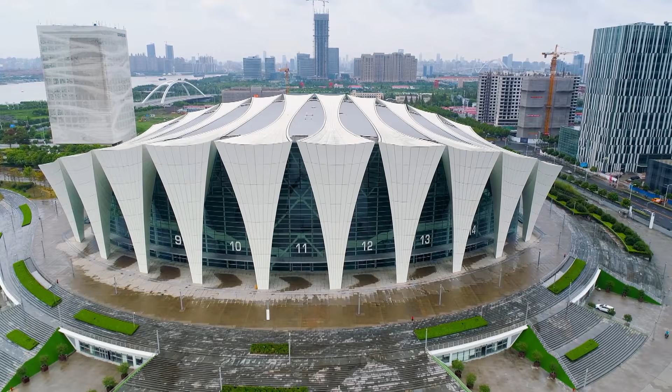Shanghai, city of the future. Vying for attention in this fast-growing, high-tech metropolis is some of the world's most cutting-edge architecture and ever more extraordinary feats of engineering.

There is a great competition for creating these landmark buildings. The clients have always asked me, build me a landmark.

Architect Martin Jochman has been set a seemingly impossible challenge: to design a radical new hotel that will stand out in this hotbed of innovation.

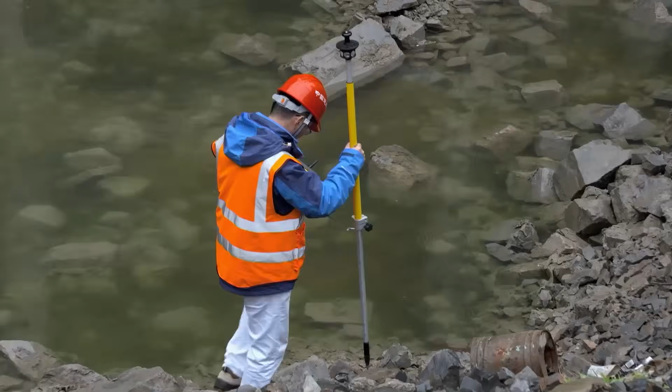But the unique site totally defies convention. It must be built 90 meters below ground level in an abandoned, flooded quarry. When I came here almost 12 years ago, it was just a hole in the ground. Now, over the years, against all the odds, this has changed.

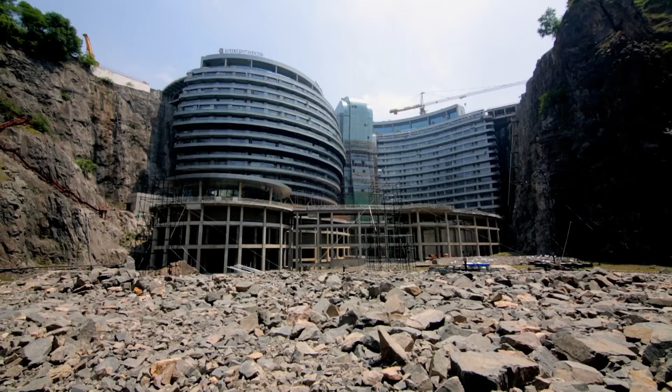Martin's master plan is one of the world's most inventive buildings. Resembling something from a James Bond movie is the InterContinental Shanghai Wonderland.

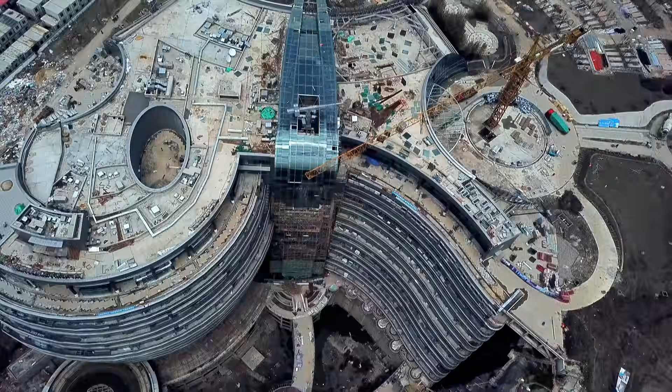This giant quarry hotel spans 100,000 square meters and is the first of its kind on the planet.

Helping to realize this epic multi-million-dollar fantasy project is chief engineer Xiaoxiang Chen.

I'm very proud of being a part of the project. Everybody is excited because it is the only one in the world.

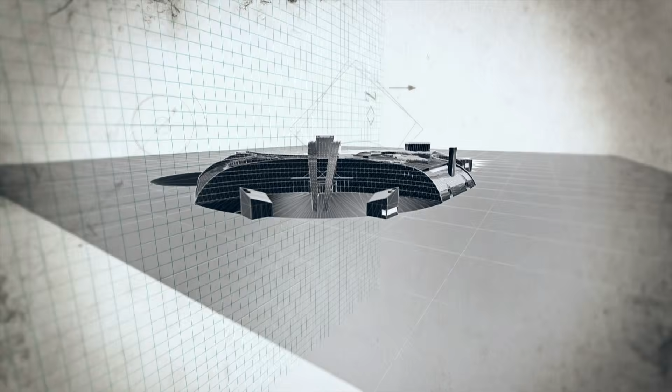What, at ground level, first appears to be a two-story building is in fact only the tip of the 336-room hotel. It projects out from the precipice and descends to the base of the quarry 90 meters below.

The glass wall in the center is designed to look like a waterfall cascading to the quarry floor. This will be flooded to create a lake, submerging the two lowest floors.

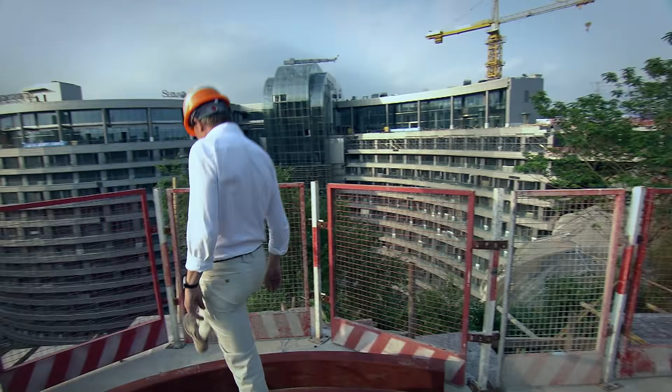It's an epic engineering challenge once thought impossible. Such an unusual location brings its problems to be solved. These can be summarized into the building shape, the seismic implications, and the fact that the building is partly underwater.

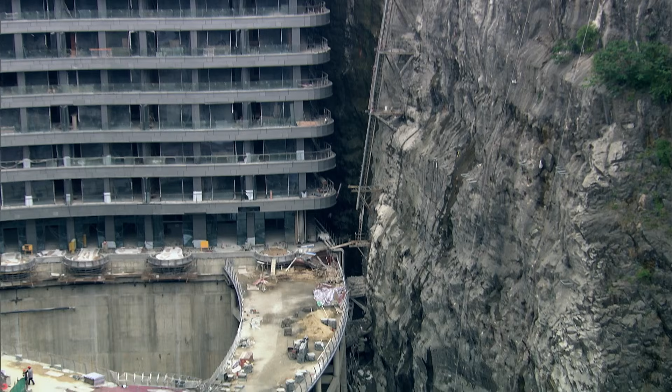Not only must it be waterproof and earthquake-proof, but the engineers are also faced with a giant problem that looms all around them. The biggest problem when we started designing this building was associated with the quarry itself, the composition of the rock.

This rock came out as part of a volcanic eruption, and it cooled rather quickly, which means some of it is quite solid, but some of it is crystallized and very, very crumbly. I can demonstrate how this crumbles easily in your hands.

This problem had to be really solved before we could start on the main part of the construction, both for the safety of the guests, but also for the safety of the workers on site. Failure to secure the unstable cliffs will mean disaster for the project.

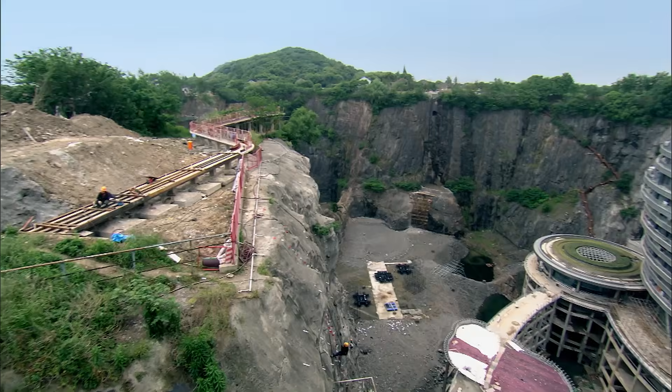Building this groundbreaking hotel will need some impossible engineering from the past.

The problem with rock walls is that they're prone to collapse. One reason why more discerning humans ventured out of caves and into homes made of other materials.

The Nabateans took rock construction to the next level, carving Petra's fabulous sandstone temples and tombs. But over the centuries, many have crumbled.

The presidents of Mount Rushmore are hewn from the toughest granite. But even they need a facelift from time to time. Any hairline cracks are filled as soon as they appear. Hey, looking good, Abe.

But there's one device that's so effective at holding up rock walls, that climbers like engineer Dan Dickrell are willing to trust it with their lives.

Oh, here it gets spicy. Woo! So right now I've climbed this rock face. I'm hanging in the air, and all of my weight is going through that rock bolt, which is anchoring me to the surface.

So the rock bolt is a smart and simple idea developed over 100 years ago. And this simple idea might hold the secret to solving the problems at the Shanghai Hotel.

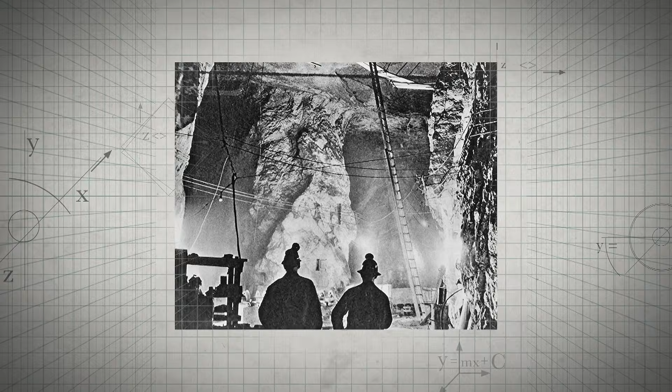St. Joe's was a forward-thinking company that prided itself on innovation. It recruited so-called experimental engineers, whose job it was to devise ways of extracting every ounce of ore.

These early problem solvers faced the challenge of scaling the heights of these walls. So this is what they came up with: the trapezes, a series of scaffolding suspended from the ceiling. The workers would work chipping away almost a skyscraper above the ground. The tools they used weighed 50, 60, 80 pounds. The men themselves were large, the rocks were heavy. Such a large amount of weight suspended above that cavernous drop.

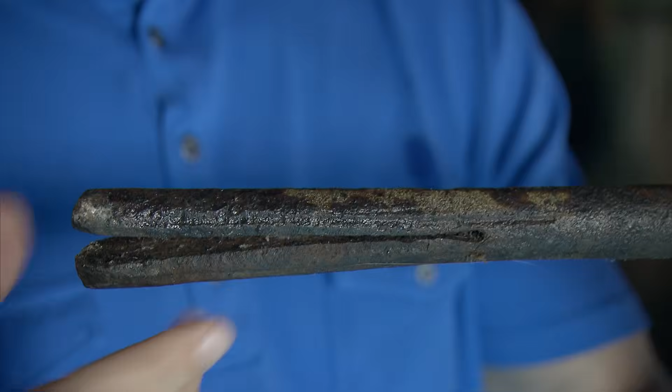Responsible for bearing all that weight, the newly invented rock bolts. This is actually an original 100-year-old split rock bolt. You can see the split on the end. How would this be installed? You drill a hole in the ceiling and then pound a piece of oak in, which effectively would be a wedge, so that when you put the bolt into that hole and pound it in, the wedge would slowly split open the bolt, creating a very, very strong anchoring point.

Trapeze mining was a great advance, but it was these rock bolts that proved to be the real innovation. It was noticed that after the scaffolding was removed, the rock bolts that still remained in the ceiling were holding up the loose rock that otherwise would cave in.

Securing a rock face is precisely what the team in China need to do. So how do the rock bolts achieve this?

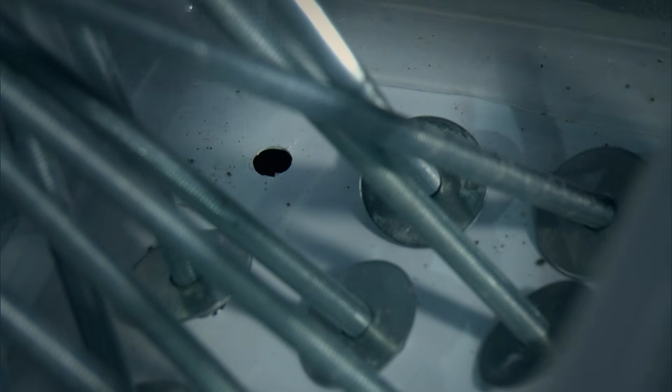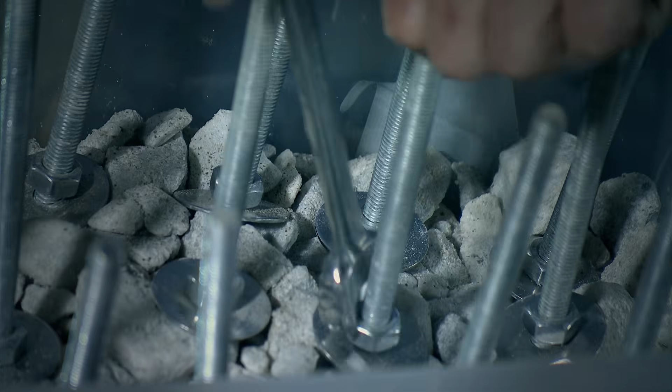I have a container that I'm going to fill with loose gravel. Now the thing about this container is it doesn't actually have a bottom. So now what we need to do is insert the bolts down into the temporary bottom. All right, let's put some gravel in here. I'm going to take the top washers and nuts and tighten them down. This will create a compressive force that binds all of the gravel together. This will replicate the forces at work when bolts are inserted into a crumbling rock ceiling.

I'm optimistic this is going to work. I'm going to need a bit of help, so I'm going to have Adam from the Bonne Terre mine come in and assist me with this. All right, Adam, slowly try and take the bottom off, the temporary bottom. What do you know? It worked. You wouldn't think it's possible, but check it out. It's really, really solid.

Management concluded that long bolts placed close together would safely knit the loose rock in the ceiling above us. Without knowing it, the miners here at Bonne Terre had inadvertently invented a real innovation, which is used all over the world today. What an accomplishment.

So how can the engineers in Shanghai take this century-old discovery and put it to work? Here are the rock bolts, which are a very important part of the stabilization of the cliffs. The rock bolts are in positions where they can be most effective in securing the cliff face on a certain grid.

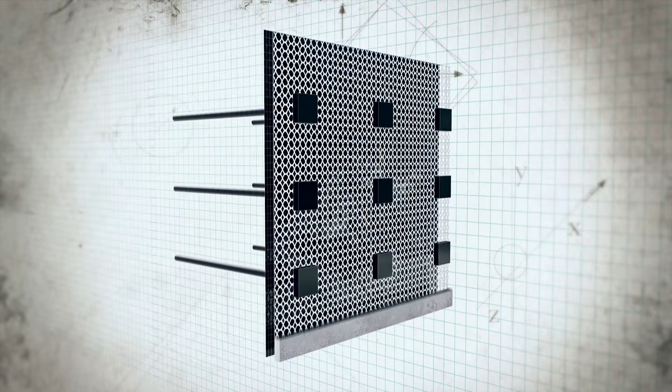The mesh, together with the shotcrete, will prevent the crumbly face of the cliff falling down and endangering the guests and the visitors. This process is quite unique to this project. It has never been done on this scale before. It is in fact one of the great challenges that had to be overcome to be able to end up with this amazing building.

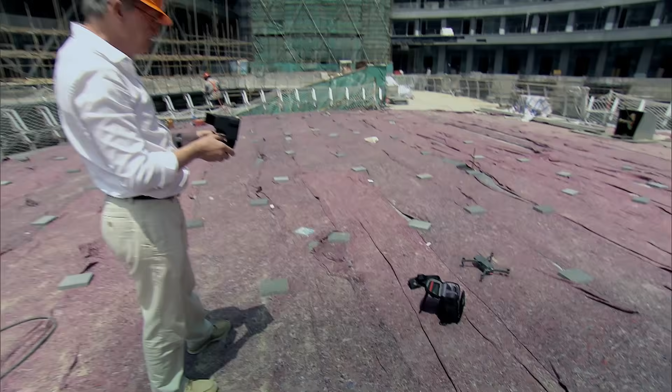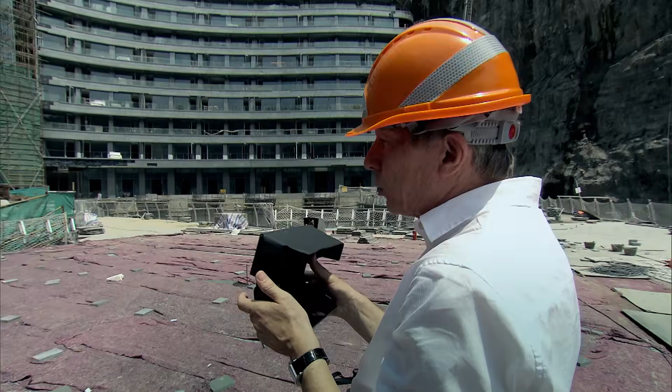And Martin has the tech to make the most of seeing his design come to life from every angle. Every time I come here, I'm amazed about the transformation of the site. To be able to actually get a picture from the same angle as you're rendering and be satisfied that this is really as close as you can get to your concept vision, that is very satisfying, actually.

But this unique design has to be built to withstand the most destructive forces on the planet. There's no precedent for this type of building in terms of seismic design. Embedded deep underground, how could they make this impossible piece of engineering earthquake-proof? Sometimes in the midnight, I wake up to think of the problem I should resolve.

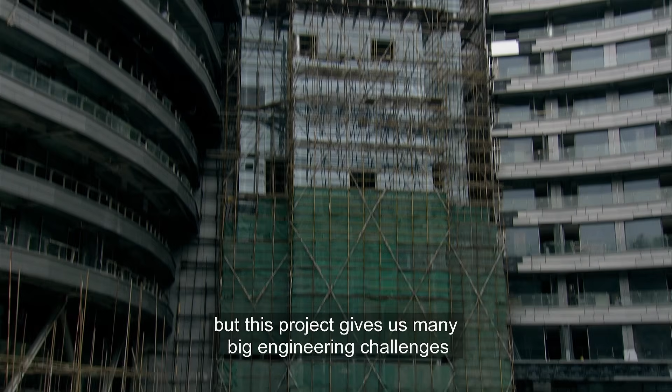In Shanghai, China, engineers are facing a subterranean challenge. This giant hole in the ground is the location for their city's newest state-of-the-art structure. A mega hotel built 90 meters below ground level. Progress is going well, we almost finished it. But this project gives us many big engineering challenges.

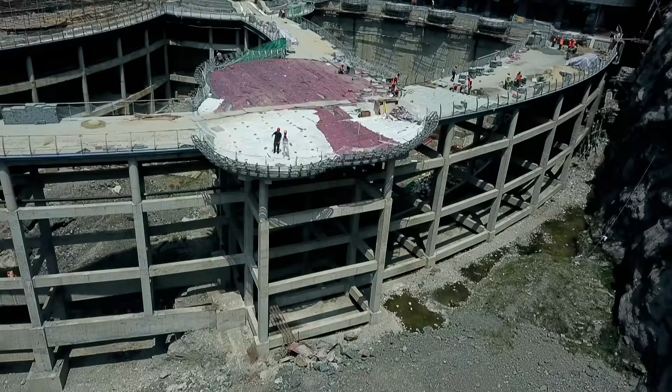Taller than the Statue of Liberty, the hotel is essentially an inverted L shape. The 10,000-ton steel mainframe is set into the base of the quarry, with the wider top section stretching out onto the clifftop above. But it has to be strong enough to withstand anything Mother Nature can throw at it, and this is earthquake territory.

There is no greater destructive force on the planet than that generated by an earthquake. And China is one of the most active seismic regions of the world. The point of convergence of the Indian and Eurasian tectonic plates, the country is riven with fault lines.

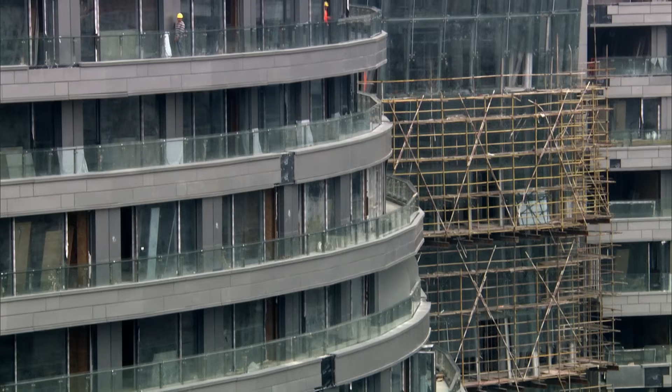Engineers here are experienced in using methods to combat earthquakes in conventional buildings. But nothing like this has ever been attempted before. There's no precedent for this type of building in terms of seismic design. So this creates a completely new problem to be solved, had to be done from first principles with the latest engineering technology.

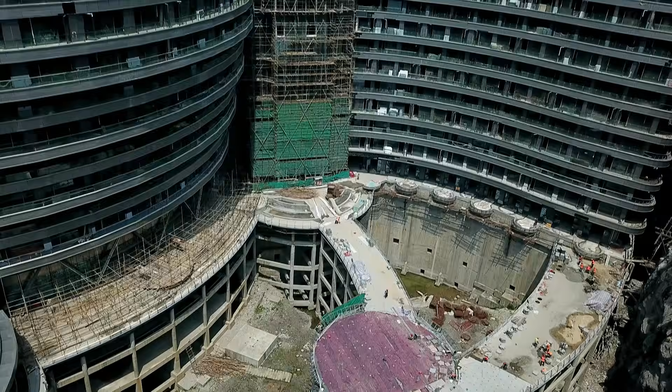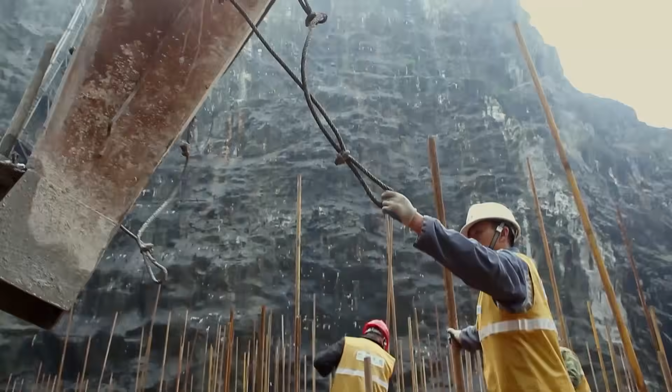To help it withstand the forces of an earthquake, massive foundations are required. As you can see, the foundations are immense, almost 50,000 cubic meters of concrete. It had to be so to give the steel structure the rigidity it needs, to embed the steel beams and columns into it quite deep, to satisfy the seismic regulations.

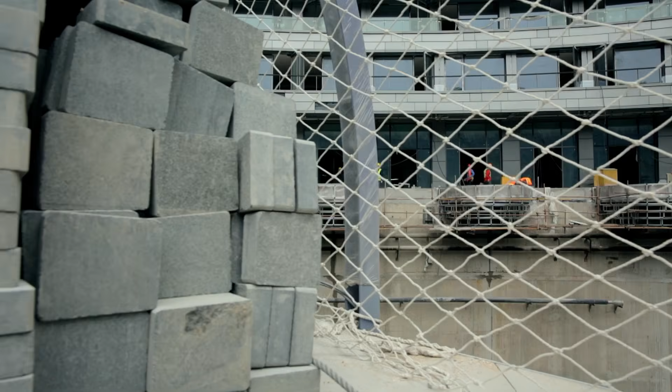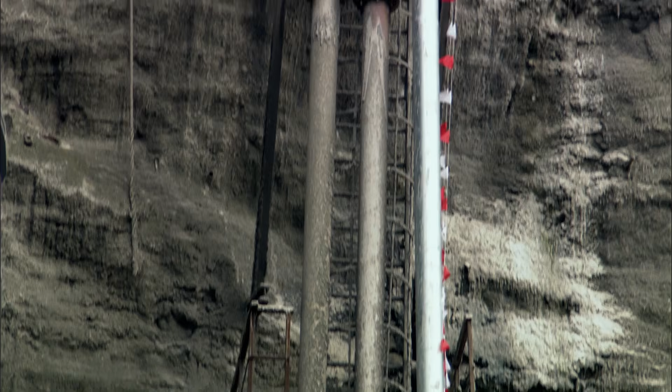But this throws a new problem: how to place such a large quantity of concrete so deep. In order to get such a vast amount of concrete to the quarry floor, the team need to come up with an innovation that defies gravity. The concrete for the foundations has to be mixed at the surface, then delivered to the base below. But sending it straight down a vertical drop means it's traveling too fast. The mix would start to separate, and by the time it reaches the bottom, it's unusable.

Normally on a building site, concrete is pumped upwards. This was placing it 90 meters down under a gravity situation, so a completely new method of pumping had to be devised for this.

It's up to Chief Engineer Xiaoxiang Chen and his team to come up with the solution. During the construction, we have encountered numerous challenges, and sometimes in the midnight, I wake up to think the project, to think the problem I should resolve.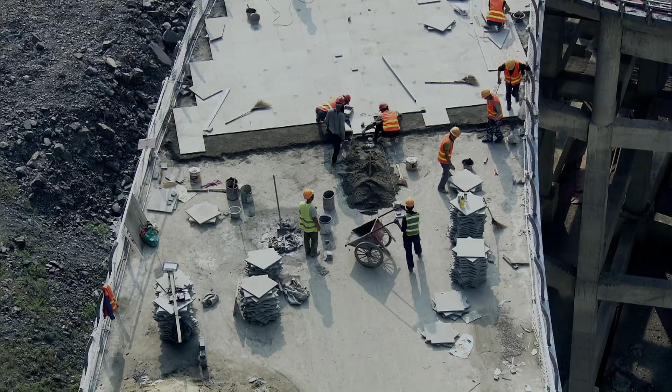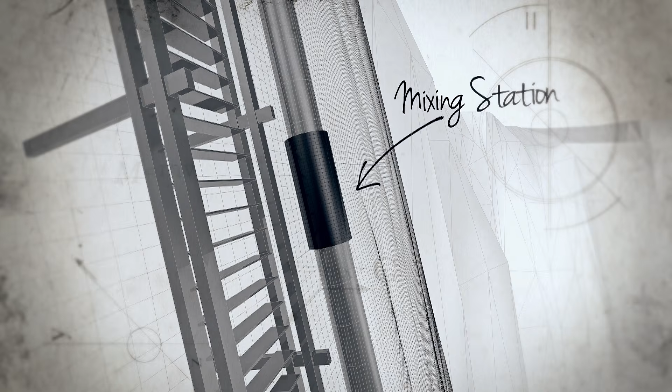The team need to find a way to slow down the concrete's rapid descent to make sure they end up with a stable mix. So they insert additional mixing stations. The concrete drops down the first 15 meters, then enters the station. It gets remixed and sent on its way, passing through 2 further mixing stations. So once it reaches the base, it's the perfect consistency. With lots of hard work, I'm very happy about the result.

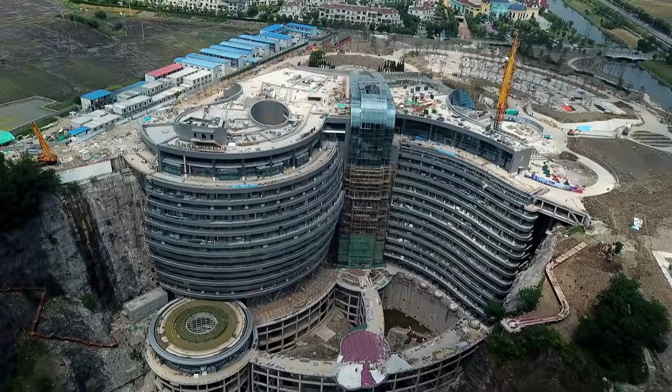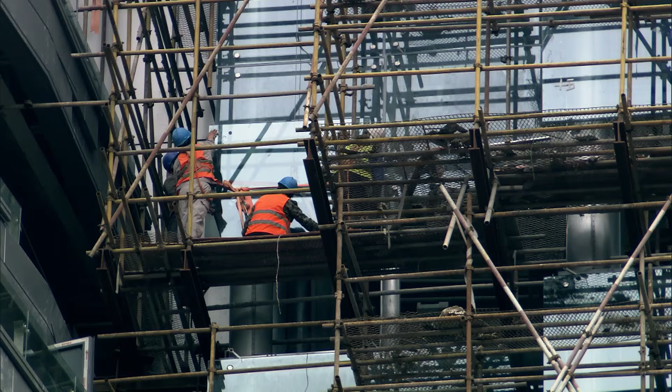But incredibly, 50,000 cubic meters of concrete on its own is not enough to protect it from an earthquake. Due to the hotel's unique design, the team need an extra engineering solution to prevent it from being pulled apart by opposing forces. It is a tall building attached at both ends, and in the event of an earthquake, both parts of the building move in different directions and different speeds. So this creates completely new problems. To prevent disaster, the engineers have to find a way to protect this unique structure.

When the Earth moves, the only survivors are those that can somehow go with the flow. The Incas built Machu Picchu from precision-cut stones with no mortar. The stones are said to dance through the tremors, then fall back into place.

China's Forbidden City has withstood over 200 earthquakes, thanks to an interlocking joint which spreads the impact of any tremors. What these techniques have in common is the flex factor.

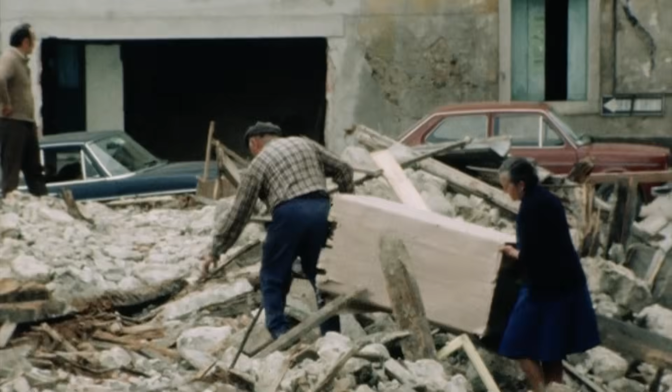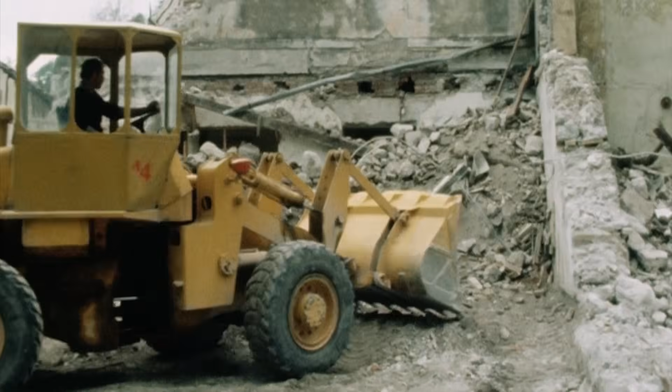Italy has suffered centuries of devastating earthquakes, more than any other European country. So engineers here have been developing new ways of building which won't yield to the forces that regularly rock the landscape. These might hold the key for the team in China.

During the last 40 years, we learned to build structures safe to withstand earthquakes. Seismic protection engineer Samuele Infanti works for the company that designed Europe's first bridge engineered to be earthquake resistant: the Somplago Viaduct.

Its twin decks run in parallel across Lake Cavazzo, and despite being 1.2 kilometers long, it remained standing when a powerful earthquake destroyed the nearby village.

So now we are entering the village of Somplago. As we can see, more or less all the houses were rebuilt after the earthquake. But it was only the bridge that survived that earthquake with no damages. So how exactly did the bridge remain intact?

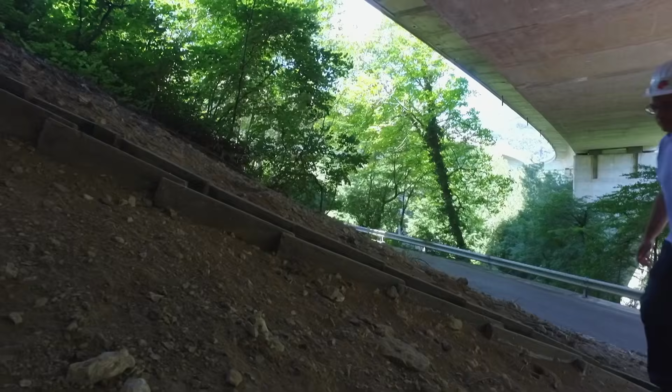Like the Wonderland Hotel, it's attached to high ground at the top and low ground at its base. The secret of its success can be found where the underside of the road deck meets the top of its vertical piers.

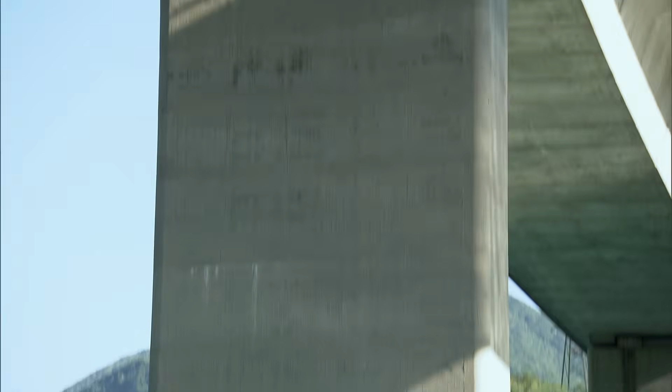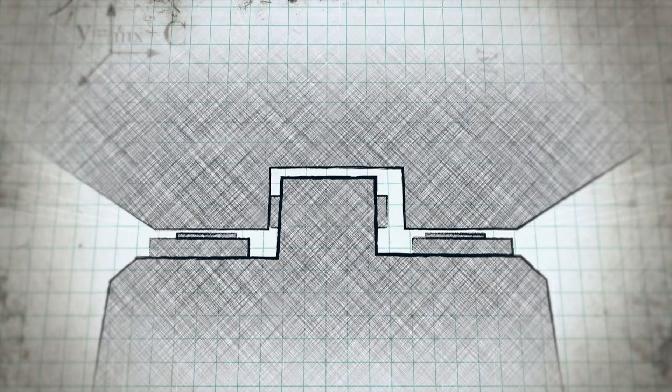The idea was to isolate the deck above the bearings from the ground. During an earthquake, this bridge will move back and forth along the longitudinal direction. Using a principle known as seismic isolation, the key mechanisms are the mighty bearings which cap each individual pier. These are made up of sliding metal plates which allow the deck to move freely, protecting it from tremors at its base.

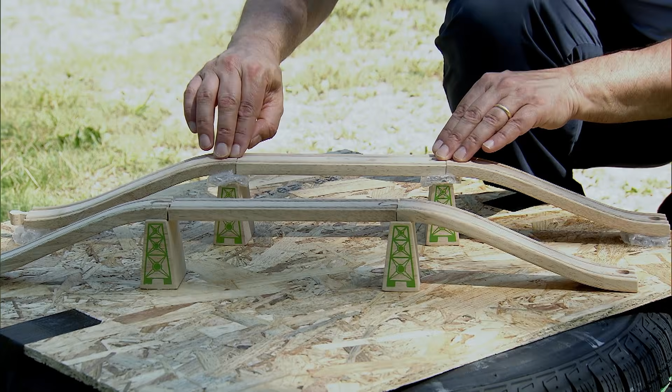We want to simulate the effect of a seismic event, and this represents a conventional way of fixing the deck to the piers. But on the second bridge, bubble wrap is added to simulate the bearings. We can see that now the deck is kind of isolated - we can move it back and forth in all directions. These elements provide a filter-like effect, filtering the acceleration transmitted by the ground moving at the occurrence of the earthquake.

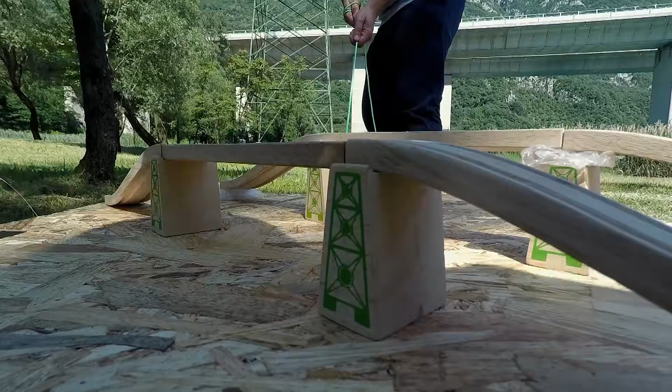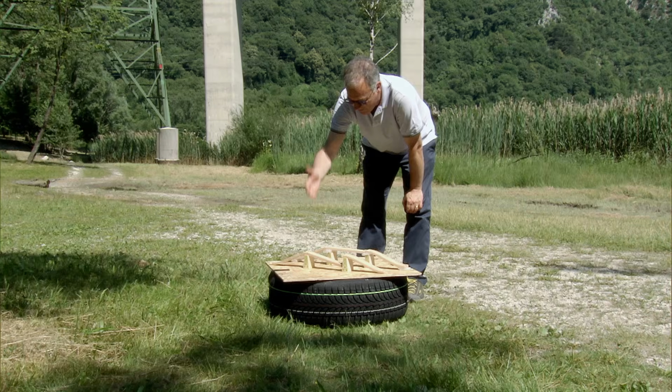Dragging the bridges will replicate the vibrations of an earthquake. You see that this model provided the typical collapse, whilst the other survived without damages. The bubble wrap in this case is simulating the behavior of the isolators. It means that the ground will move in a very quick manner, while the deck will move slowly, and immediately after the earthquake, the bridge can be ready to survive another event, an aftershock. This way we can avoid the damage.

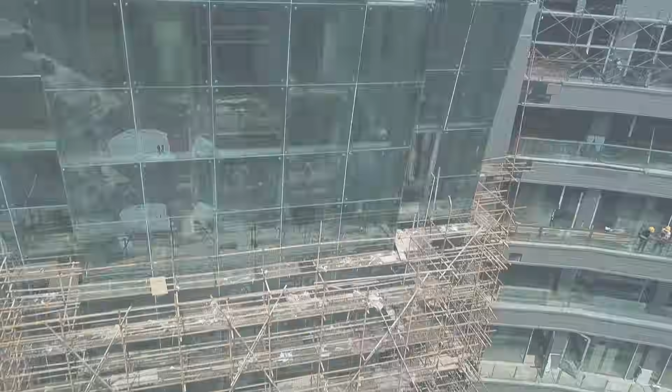The principle of base isolation has been applied to structures around the world, saving countless lives. But can the engineers in China apply the same method to this unique construction project to avoid destruction?

The structural solution is totally unprecedented and comes with the fact that it's a building fixed at two ends. In order to satisfy the seismic requirements of the earthquake, it is important that this structure can move to a certain extent.

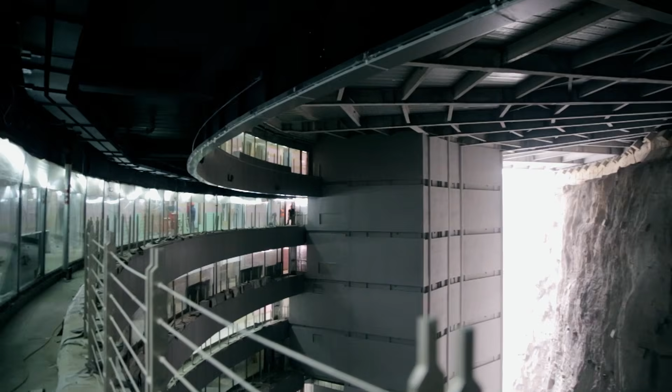Here in the inner atrium, the rear of the hotel looks out onto the rugged exposed wall of the original quarry and the steel framework that supports the building. It's this that provides the ultimate defense against earthquakes.

The structure consists of horizontal trusses that sit on a concrete beam. These are then connected to the vertical trusses that are firmly embedded in the mass concrete at the base of the hotel. Together they form a very rigid structure, but in case of earthquake, this can still move.

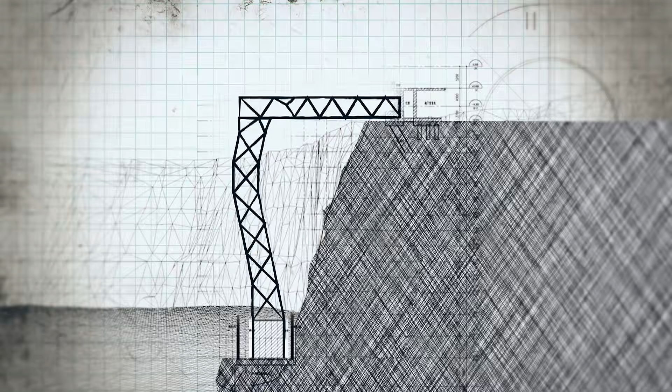The horizontal trusses are not fixed to the platform at the top. Should the worst happen, the horizontal trusses can slide back and forth and ride out any seismic activity. It's actually sitting loosely on a platform that will allow it to move freely. This will make it possible for the building to stand up during a very strong earthquake. It is a unique solution to a unique construction problem.

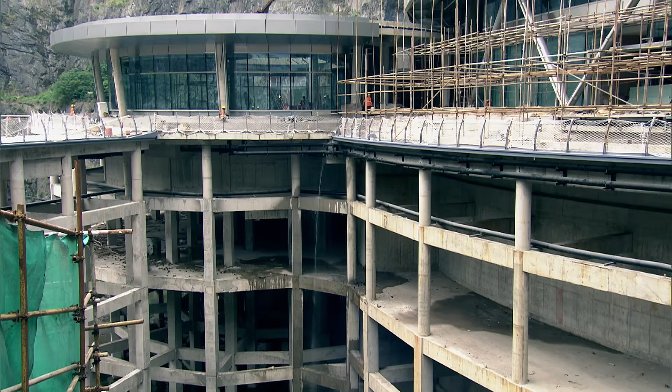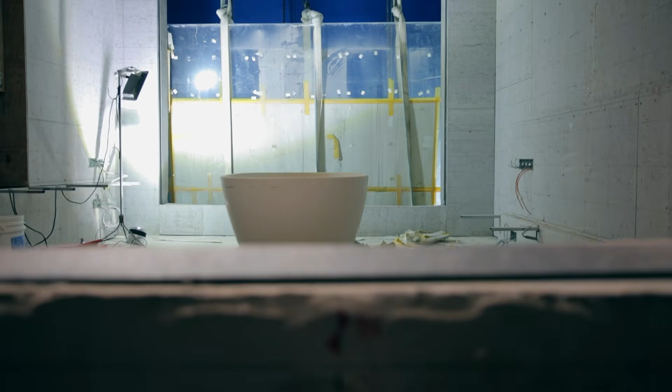With the structure now earthquake resistant, the engineers must face the next impossible engineering challenge: creating rooms underwater. There is no light in this corridor because right now we are working on the underwater space. But how can the submerged levels of this futuristic development withstand huge amounts of water pressure? As an engineer, we need to find a solution for that.

Here in Shanghai, developers are pouring hundreds of millions of dollars into this giant hole in the ground to create a mega hotel - the first one ever to be built in a quarry.

Its architect is Martin Jochman. Such an unusual location brings many challenges. One of those is the fact that part of the building is underwater. In fact, where we are standing will be submerged. The quarry originally had a lake at its base, which was pumped out into the canal that runs above it. But the plan is to flood the quarry again before it opens.

Walkways will cross the man-made lake to a central island, and a brand new waterfall will be built on the west face of the quarry. The bottom two stories will be submerged below water level, and an underwater restaurant and bedrooms will be surrounded by giant fish tanks.

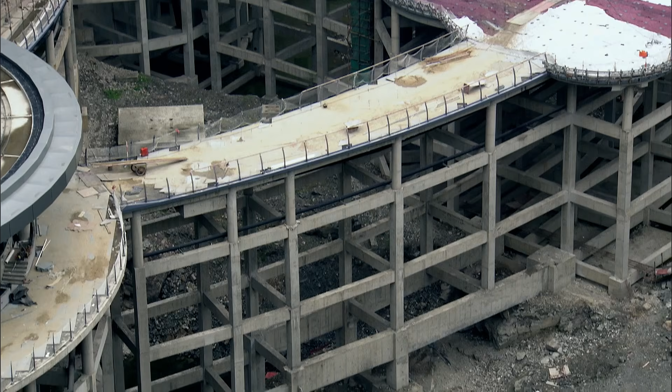One of the biggest problems to overcome when designing this building was the underwater rooms and public areas. Architecture design manager Hao Tseng is overseeing this part of the project. You can see there is no light in this corridor because right now we are working on the underwater space. Here is our very special and exclusive room. There is no traditional window. Instead of that, we have a big aquarium here.

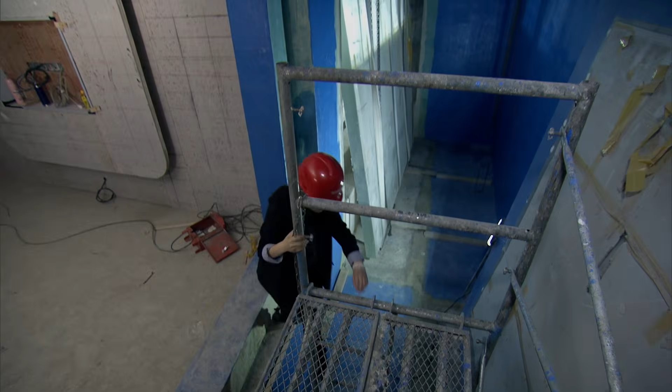To make this experimental concept a reality, the designers are setting themselves a seemingly impossible mission. Our biggest challenge is how to deal with the water pressure and how to deal with waterproofing. It's very important to keep the water away from the room. The volume of water required exerts so much pressure that ordinary glass would break and flood the rooms.

In order to realize their dream of underwater living, the engineers needed to look to the skies of the 1940s. At this airfield just outside Los Angeles, engineer Dan Dickrell is finding out what the team in China can learn from one of the most important planes in wartime history, the Boeing B-17.

As a child, I built models of this, one of the most iconic bombers of the Second World War. It's absolutely breathtaking. Known as the Flying Fortress, this heavily armored warbird was designed to penetrate deep into enemy territory to carry out precision daytime bombing.

1, 2, 3, 4, 5, 7, 8, 9, 10, starting number 3 again. This is one of the few airworthy models left in the world.

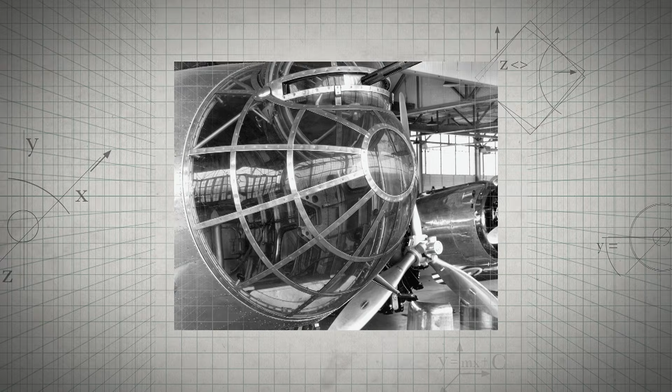The original nose of the B-17 was composed of a metal frame and large amounts of real glass. If you've ever broken real glass, you realize glass shatters. This is obviously not great for the people behind the glass, with huge amounts of dangerous, sharp particles coming right at them.

To solve this fatal flaw, in later models this was replaced by a clear dome made of a brand new material: plexiglass. It was the invention of chemist Otto Röhm. Röhm's life's work had been the development of new plastics, but he discovered plexiglass by accident.

Röhm had MMA, which is a rudimentary acrylic, in a petri dish. Sunlight hit the dish, heating up the MMA and polymerizing it, creating PMMA, which we call plexiglass. He discovered that if it was heated, it could be molded. So I'm going to keep mechanical strain on it while it hardens. As it cools, it will retain the shape. Yeah, it worked. It's a great material.

But crucial for aviation engineers was how it responded to stress. Plexiglass doesn't shatter, and that particular property is what enables this aircraft to be such an effective daylight bomber. This was a major development.

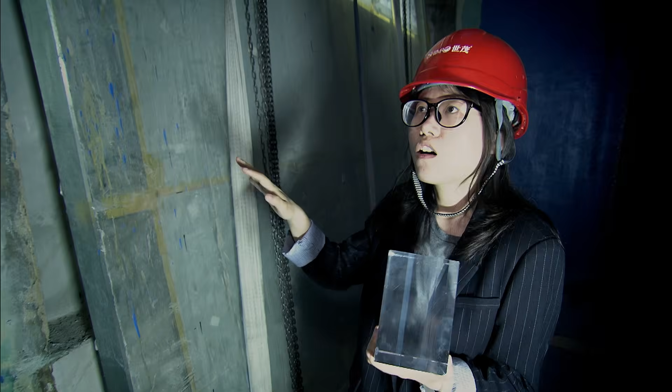Within the giant concrete foundations sit massive water tanks. We want the view of the water tank as big as possible, but it has to be very clear. And due to the water pressure, the material has to be very thick. So we found acrylic glass. It's like 13 to 16 centimeters, and you can see it's very clean, and people can easily see through it.

But with added thickness comes added weight. This window alone weighs more than 2 tons. You can see the acrylic glass is very, very heavy. We need 4 people at the same time to lift the chains.

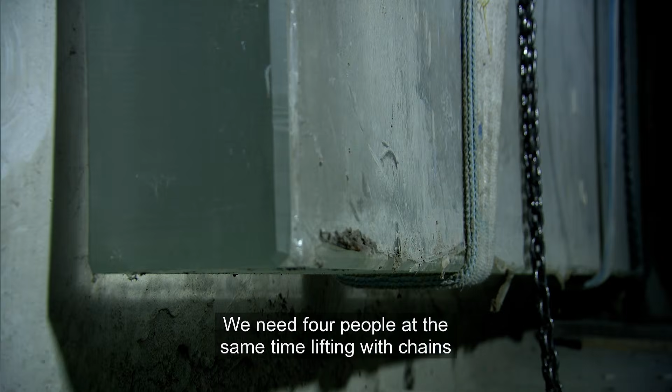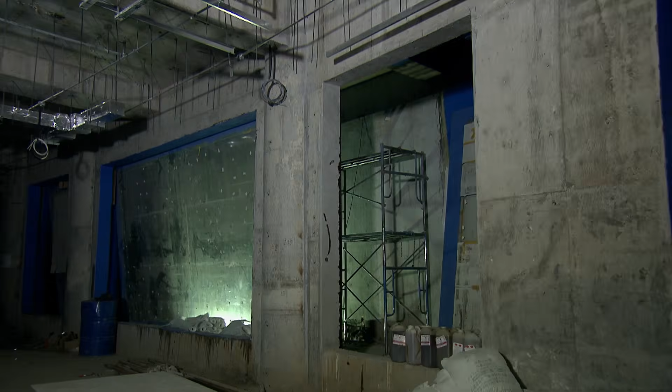The largest windows on site weigh 4 tons, used in the hotel's underwater restaurant. So now we are standing in the biggest space underwater. This is the dining room of our specialty restaurant. You can see there are 5 pieces of acrylic glass. The big acrylic glass is more than 5 meters wide and 3.5 meters in height. It's very, very big and heavy. But behind them, it's a big water tank. It's like 30 meters wide.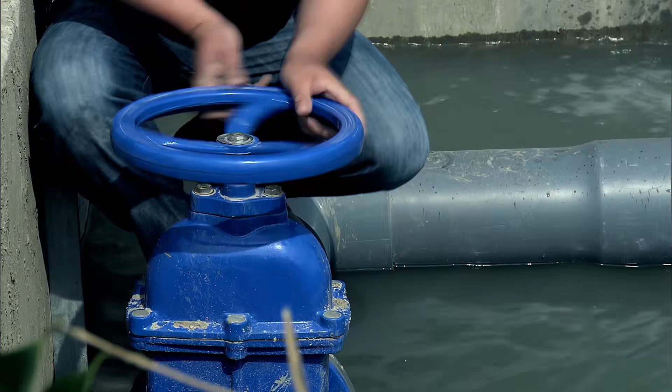From the watery depths of this extraordinary construction to its heady heights, the engineers still face a high-level challenge at the summit of the cliff face. To build something at the top of the cliff is a really big challenge for us.

In their quest to create more impossible engineering, Shanghai is famed for innovative structures punctuating the horizon. A new landmark is underway, but it won't be changing the skyline. Instead, it's pushing engineering boundaries deep underground.

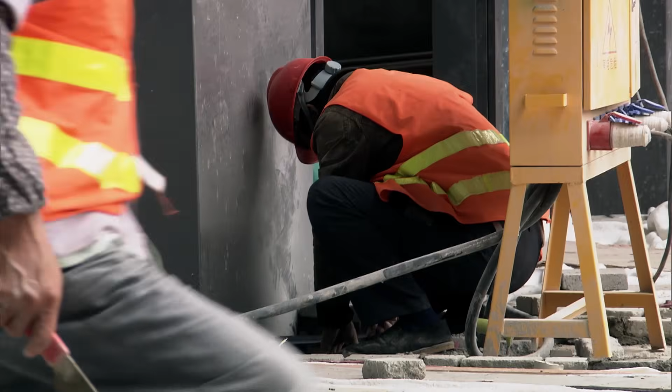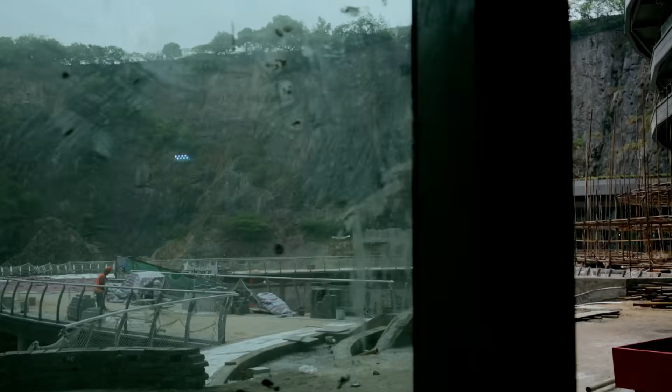We face many new challenges. Building in a quarry is a mammoth operation.

But the setting has provided inspiration for its biggest and most complex design feature, dreamed up by Martin Jochman. The glass waterfall is symbolic of the connection of the rock face, the cliffs, with the water, and the shape is itself suggesting the falling water shape. This is the most difficult part of the whole structure.

It's curved, it's irregular, it's covered with glass, so it's a great challenge to actually put it together. A complex steel framework is being covered with over 5,000 square meters of flat and curved frameless glass panels to create the illusion of a glass waterfall.

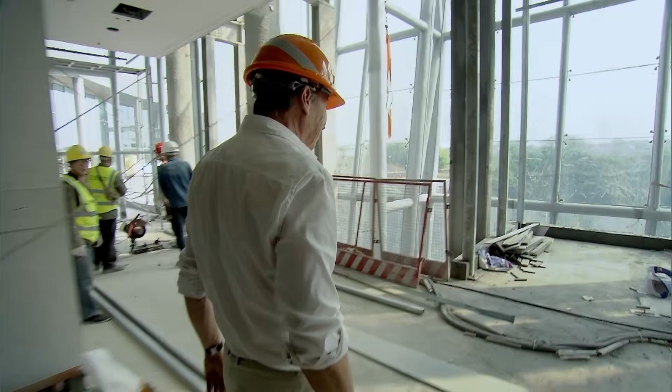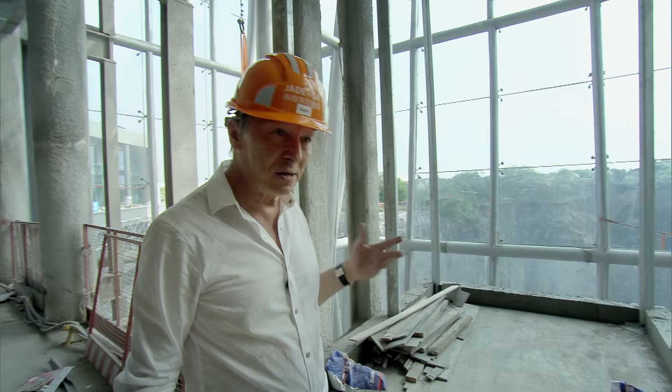Now we are actually inside the glass waterfall. It is a vertical circulation containing observation lifts which will take guests and visitors from this floor down to the base and to their guest rooms.

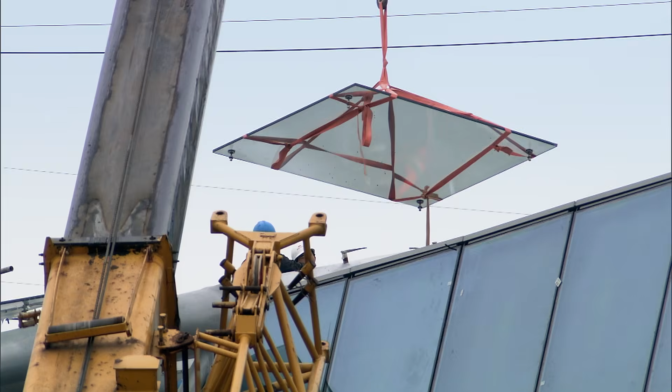When I see what's been produced, I'm very happy that my original idea that I sketched a long time ago is there. All credit to the team, the people involved in the design, the structural design and the construction.

The next phase is to start filling the quarry pit to create the man-made lake. It will need 200 million litres of water. With such a huge volume, it's a slow process, filling water into the pit. I'm very excited for it. It will take 4 months to fill it, but I'm very patient.

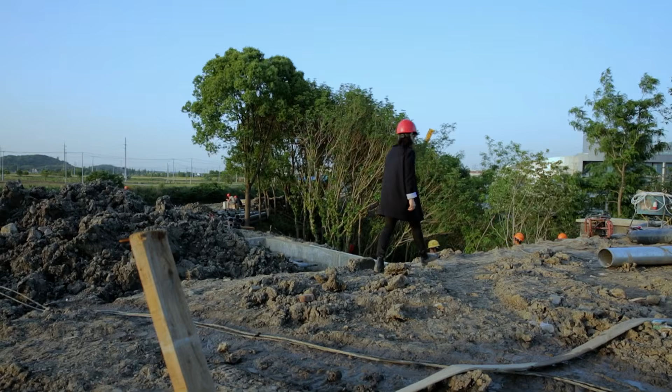For architecture design manager Hao Tsen and her team, there's one more challenge: an audacious final addition to make the most of this unique location from every angle. That's a really magic and amazing view here. It is great to stand at the bottom and look up. We want to build something at the top of the cliff so people can stand at the top and look down.

The team want to somehow create a walkway right at the top of the 90-meter high cliff face. It's an ambitious plan. To build something at the top of the cliff is a really big challenge for us. We want to build something sticking out of the cliff wall, and it should be strong and safe enough. It's really tough for us. The solution could lie in an engineering innovation embraced by a famous trailblazer of the past.

In the wilds of Pennsylvania, tumbling rivers cut through the forests of the Appalachian Mountains. It's here that a landowner threw down the gauntlet to an up-and-coming architect to design him a home. Civil engineer Scott Hamilton is here to see how it might help the team in China.

Falling Water, a truly amazing architectural building. It challenges the very landscape it sits upon, and many have described it as America's most famous house.

The Falling Water House is the brainchild of innovative architect Frank Lloyd Wright. It was commissioned by wealthy Pittsburgh businessman Edgar J. Kaufmann, who wanted a home where he could hide away in nature, yet it had to be a big enough space where he could entertain lots of people.

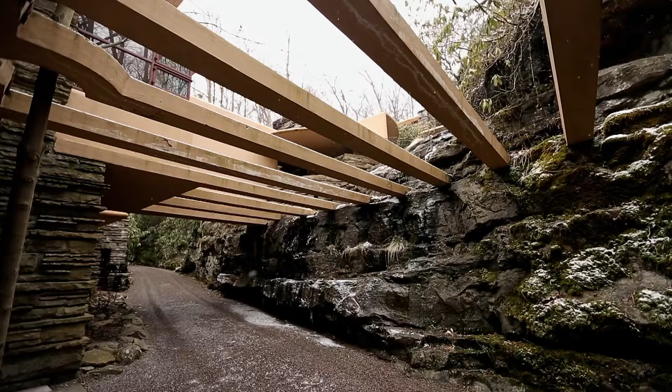Like the hotel in China, the location of the site proved the biggest challenge. Surrounded by rock faces and a river, the plot of land wasn't big enough for the house Kaufmann craved, so he left it to Wright to find a solution.

What Wright came up with is this: a series of rooms and gigantic balconies with seemingly no support beneath, essentially creating spaces in thin air. Wright pulled off this balancing trick by anchoring these platforms so deeply into the central chimney they didn't need any other support, providing he made them strong enough.

This will be my Falling Water house, just like Wright's design. So we take our ground level balcony. As you see, if we put it out, we need something to counterbalance. Wright used his chimney stack and the main structure to do that, so I'll use a brick. And then we have our next level, and again we need something to counterbalance that. And then we have our top level, and we'll counterbalance that. So here's my Falling Water house model.

So let's have a look at what can happen when things go wrong. As we take our load and put it on our balcony, we see it starting to bend down. As we increase the load, we see it bending more and more. We get closer to our limits, and we have a failure.

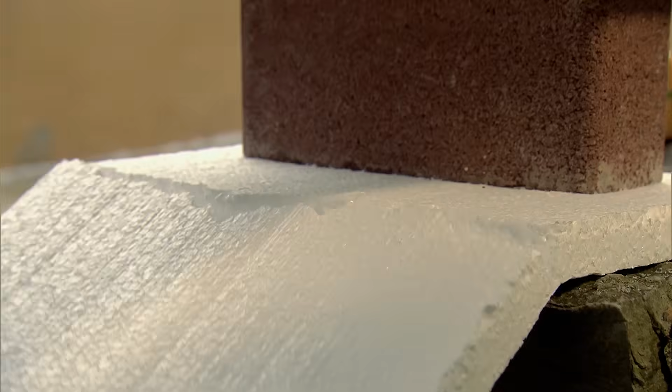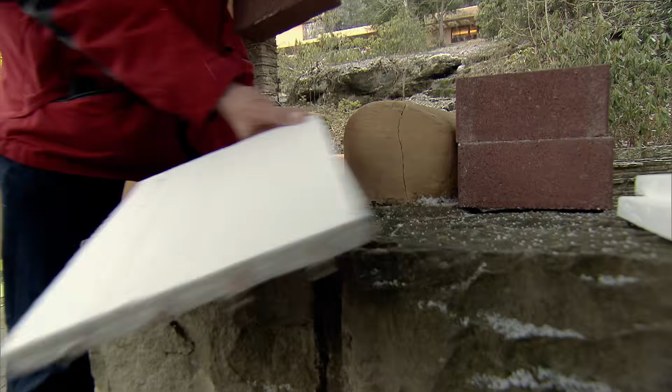So Wright's ingenious solution was to reinforce these cantilevered floors with lengths of steel. So there we have our reinforced cantilever. Let's give it a go and see what happens. We put our load on, and we see it holds, just like we want it to.

This design relied on a careful balance of both geometry and tension and compressive forces. If one part of this was off, the whole structure would fail. It was so radical for its day. Falling Water is a national treasure and a truly great engineering feat.

Innovative design relies on impossible engineering. Wright's cantilevered platforms started from 10 meters above the water below. In China, they're 8 times that height. This is the Skywalk. You are 80 meters high above the bottom of the quarry.

To create this impossible structure, the team turned to Wright's cantilevers. We use cantilever series to support this skywalk. We cut holes into the rocks and insert many reinforced bars to build such a horizontal concrete base. Using the cliff itself as the anchor point, 42 holes were drilled up to 2 meters deep. Steel beams were then inserted to carry the 74-meter-long stretch of reinforced glass.

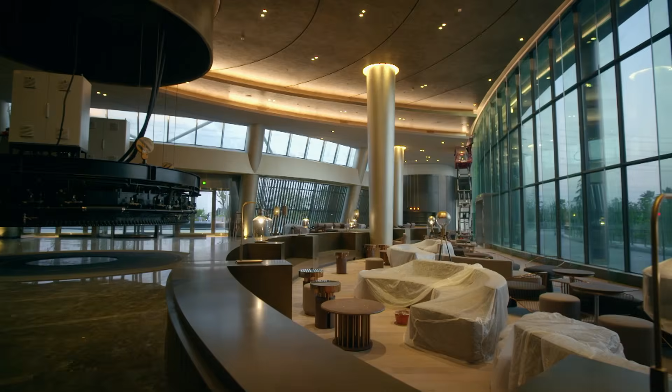12 years in the making, from the first concept to 5-star reality, the InterContinental Shanghai Wonderland is almost ready to open its doors to the world.

Creating this unique subterranean structure has been an epic undertaking. When I first saw the site, what I saw is really, really incredible. Working on this project is like a dream come true. The engineering challenges in turning this abandoned quarry into a luxury resort have tested those involved to the limit.

The whole idea seemed too fantastic to be realizable. I'm happy to say that the results are quite amazing, by drawing on the great pioneers who've gone before. It's absolutely breathtaking.

Adapting, supersizing, and creating innovations of their own, the engineering and architectural teams of this veritable wonderland have succeeded in making the impossible possible.

This is the most important project in my life. When the first guest arrives, I will want to cry. I love every part of the hotel.